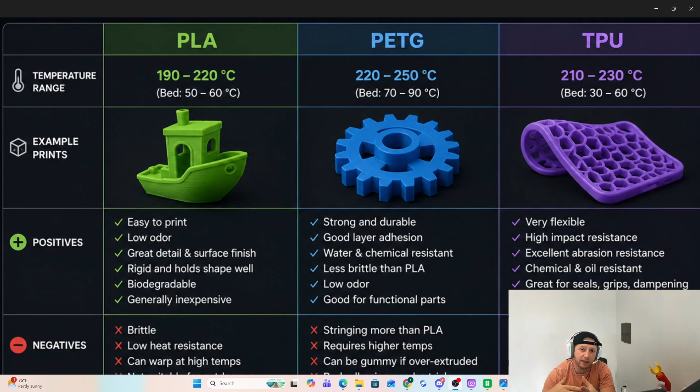Okay, now we're going to jump over to Bambu Studio, and you'll see I have 3 cylinders here with all different types of filament set to each. I have PLA as the blue, PETG as the yellow, and TPU as the red. Now you'll see it says generic next to the PLA. That is just the preset for a generic profile that can be used for many types of brands.

You'll see when I drop down the menu here, I have Bambu, Generic, Overture, Polymaker, and Sunlu. Now Bambu, obviously Bambu Studio, that's their filament. And if you were to select any of these, you can actually go and order the Bambu filament from their website. And when you put it on your AMS, it will read it using an RFID chip and tell you what filament you're using.

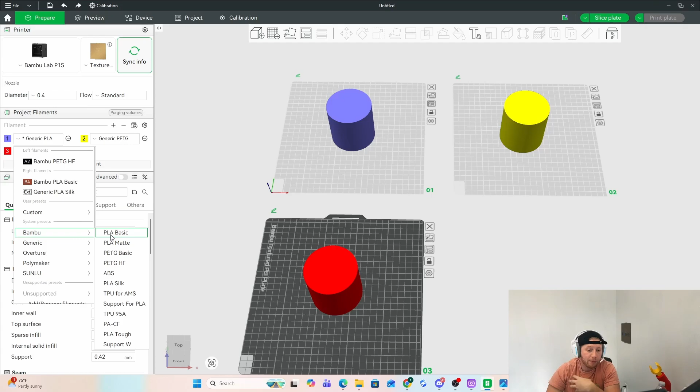So it's really just a plug and play system. But I preferably go with Generic because I like to save money and go with some of the other brands out there. You have Overture, Polymaker, and Sunlu, who also got their way onto the Bambu Lab Studio program. So obviously all these guys are very similar when it comes to quality, but I mainly stick with the generic settings and kind of tweak them to what I like.

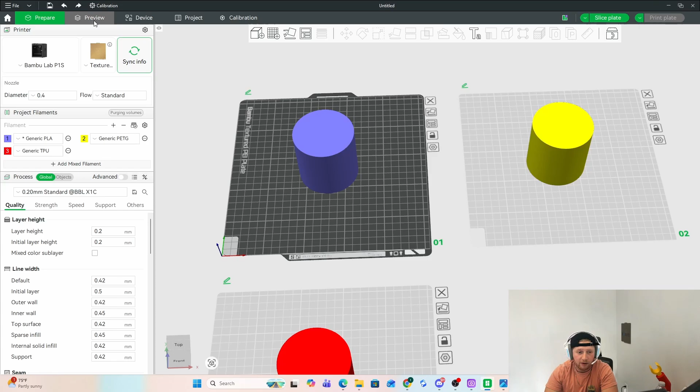Now I'm going to show you real quick just the time difference when it comes to printing TPU. If you see, I have PLA on this cylinder, which goes to 1 hour and 57 minutes. I have PETG also at 1 hour and 57 minutes. And then if I go down to my TPU, you will see it's at 6 hours and 33 minutes of model printing time. So yeah, it does really increase your print time.

So make sure when you're doing TPU, it's for a specific reason. You're not just using it because you have that filament laying around. It's going to be a waste of money and a waste of time. And when it comes to money, you'll see that TPU is more expensive. PETG is normally on the lower end and PLA is kind of somewhere in the middle.

So I would say always stick with PETG and PLA so you can keep your costs down when you're prototyping or doing small stuff around the house. Once you jump into some of the carbon fiber filaments, ASA, ABS, some of those filaments can be a lot more costly.

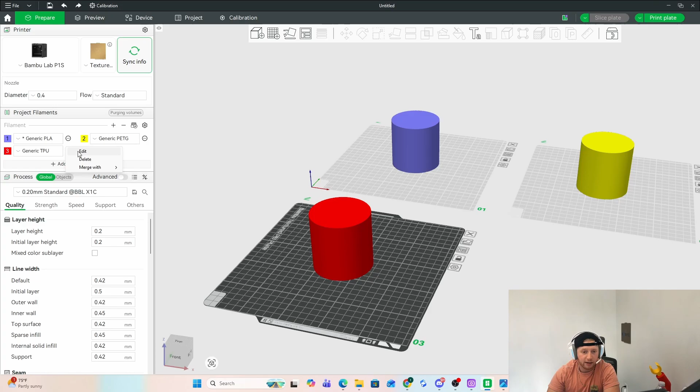Now, if you want to make any edits on your filament, we will get into more of this later on, but you'll see there's 3 dots next to the preset. If you click that and go to edit, you will see that there's a filament tab, and under here is where your nozzle temperatures are and your bed temperature.

So if we start at the top, you'll see PLA. We're going to scroll down and go to print temperature. For the textured bed, that's what we're using. I'm going to increase my bed temp to 60 degrees for my PLA for the initial layer. So that means that first layer that gets put down is going to be at a hotter temperature on the bed, so it has a better chance of adhering to it.

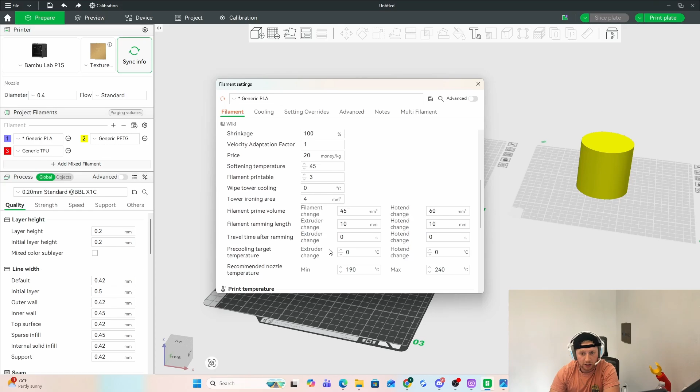We have our nozzle temperature, so 220 and 220. If we want to increase the nozzle temperature as well for the initial layer versus the rest, you can. I usually don't, but this is where you would find those options and tweak those settings. The other really popular settings that people change is the max volumetric speed and the flow ratio. But again, we'll get more into that later on in the guide.

Now, there are many different types of filaments when it comes to PLA, PETG, and TPU. I would stick to the generic version first, just the standard one that's the cheapest. But eventually, you can get into like PLA silk, which will have some dual colors. They have PETG carbon fiber. There's different softness of TPU. But for the most part, people stick with 95A.

Just make sure not to put that through your AMS unit because it will clog the motor. There is a specific TPU meant for the AMS called TPU for AMS from Bambu Lab. So if you want a version of TPU to go into that, you can use it. It's just a lot more stiff. So I would, again, just try to stick with those standard filaments, and we'll get further into other more advanced filaments in future videos. We're going to end there.